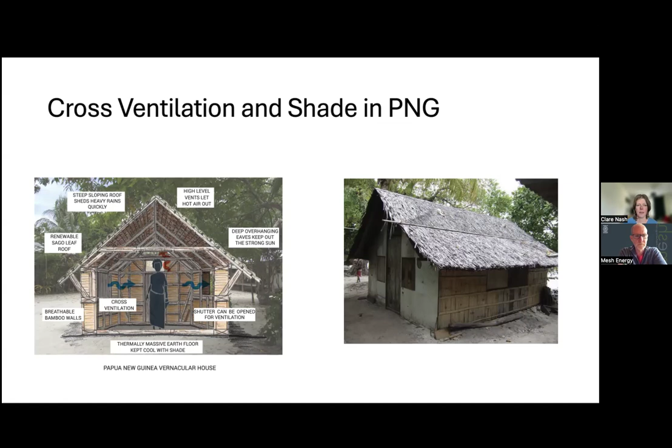It has a very steep sloping roof because it rains a lot. It's very renewable, very easy to build yourself. Lots of cross ventilation. So when you go in one of those, it's lovely and cool, even though it's absolutely belting hot outside.

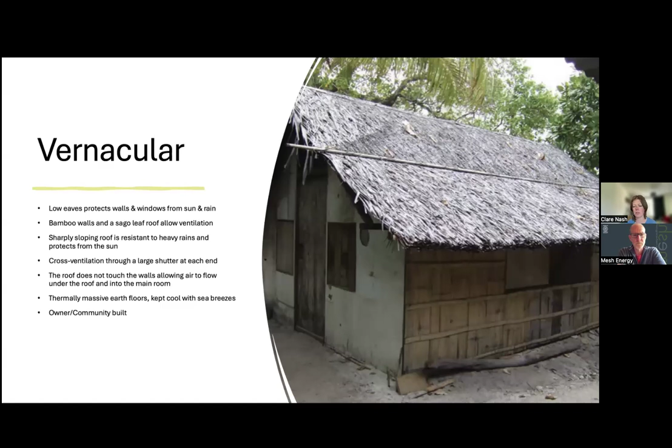So I went to look at the mining relocation housing, because there are lots of gold mines on Papua New Guinea, and they needed to relocate people in an appropriate way, giving them something that's aspirational that they actually want to live in, rather than just you have to move, you have to be plonked here kind of thing. So they worked with some architects called Asai Consult, who tried to take all the best bits from the vernacular and turn it into a new building, which mostly worked. It had the aspirational thing. They all wanted to move in one of these.

And the other issue was that when the mine goes, there would be no power. So they couldn't just give them aircon. They all wanted aircon, but they couldn't give it to them because they knew the generators would all go with the mine. So it had to be completely self-sufficient. But some things just weren't feasible on a mass scale. So the sago leaf roof just doesn't make sense because it's expensive to build, and then there are ongoing maintenance costs. So they went for this Zincalume roof, which is very tough.

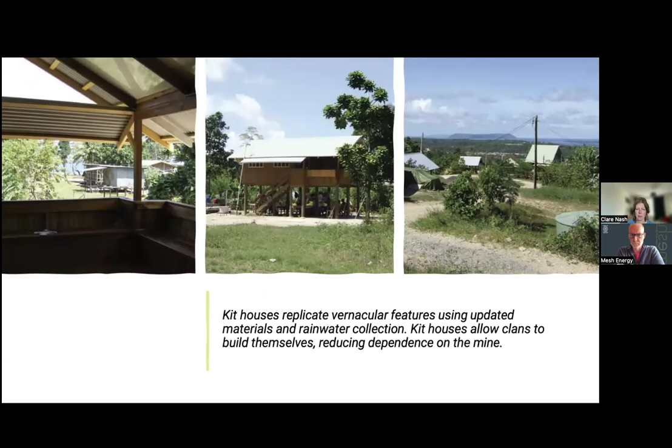But the issue with that, and I will go on to it later in another case study, is that they all want the tin roofs. It's very aspirational for some reason. But obviously the heat just goes straight onto your head. It's really hot. So how to mitigate that? They did it using an apex roof. But I think they should have gone for the full double roof that you see in Australia, which I'm coming on to. The other advantage is that they had additional mosquito proofing, and you can't do rainwater collection off the sago leaf roof, so they can now.

And it's community built. They can still literally build it themselves. There's a guy, the head of the clan, who organises it all, much like a site contractor would do here, but he's just bossing his mates around really, which is quite fun to see. So they wanted to leave them with the independence to do that.

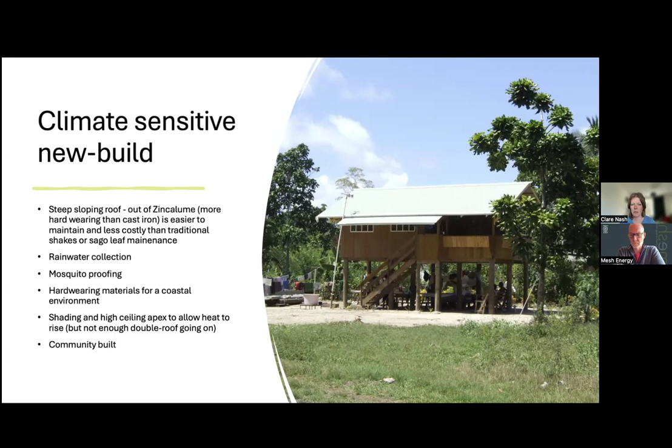On the continent, nobody has that. They have massive, great big windows looking right into each other's houses, and nobody cares. And it was a bit like that at Ashley Vale. They had the same kind of thing, and they just said it's because we've all built together, we just have a kind of courtesy. We don't stare, we just look away. Yeah, so it's a completely different attitude, and I quite like it.

Yeah, so then there's the community stuff, but then there's the tech stuff. Steep roofs obviously make loads of sense for the UK. You can have a pinprick hole in a flat roof and you'll get a leak, but you can have a whole tile missing on a pitched roof and the vast majority will just flow past, which is really beneficial. You can collect lots of water. I think we should be thinking more about cross ventilation.

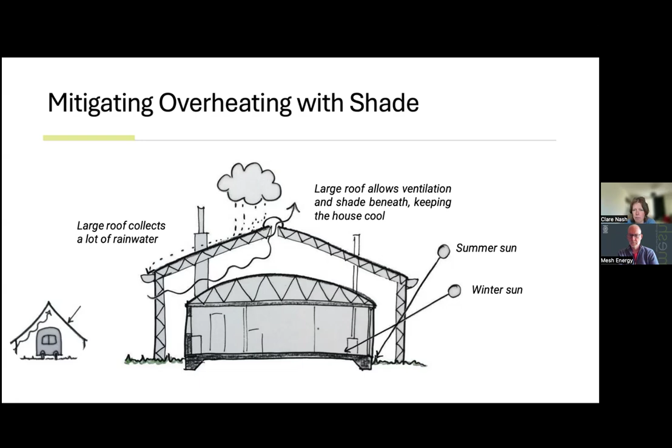Yeah, so he did this concept. So it's a bit like building under a barn, really. There's quite a big gap. So what I want to find out in the next book is what is the ideal distance between those roofs that makes it work so well. Yeah, and the heat, usual kind of passive solar shading and everything.

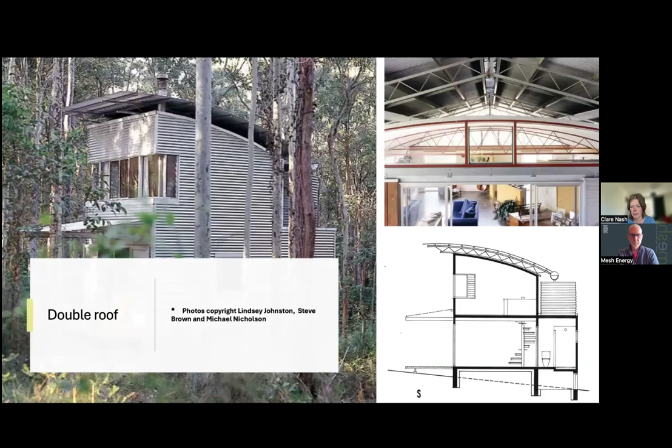So he did the same principle. These are holiday homes in the forest near where he lives. And then this is some Glenn Murcutt bits, just in case you haven't come across him. He does really interesting things that relate to the agricultural past and applying it to what people need from buildings today. He's really worth looking up if you haven't seen him.

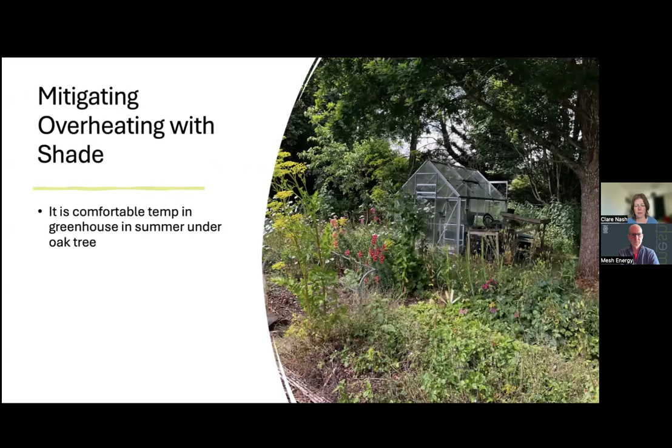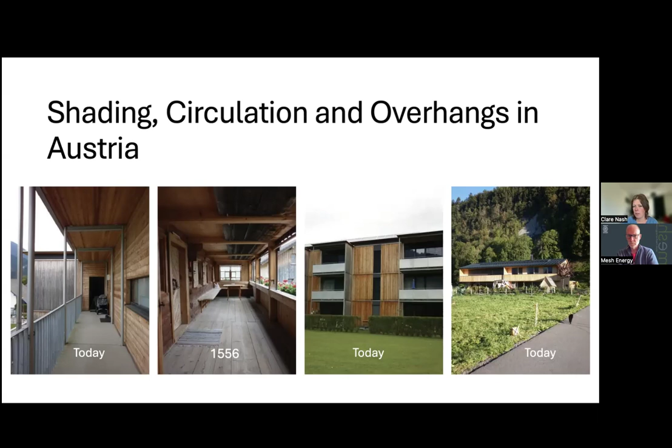This is Housing Association, completely timber frame, 3-story, new build passive house. In fact, it was more than passive house. And then on the far right, don't know if you can see it, it's the same thing, but a modern new build house for an individual. And this is Mole Architects, so they've done the same thing, but they haven't done the circulation.

And this is Charlie Luxton. I just spotted this on Instagram the other day. I thought, that can go in my thing, because it's just what I wanted to talk about. He's done that with Greencore construction, so it's prefab, but they've obviously stone clad.

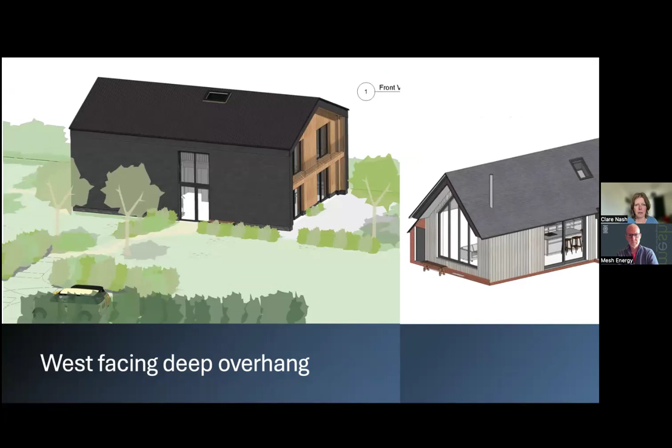Yeah, and we do bits of it. So we've got west facing overhangs that we like to make verandas out of. These are not fully realised drawings, but we're getting there; they're getting planning permission at the minute. And yeah, this is the kind of thing we do with housing.

So we take inspiration from the kinds of materials that are nearby, and pitched roofs, obviously, and we try and extend roofs to create overhangs for shade, but also it's amenity space. It means you can sit out all year round, not get wet, and also not get fried in the summer.

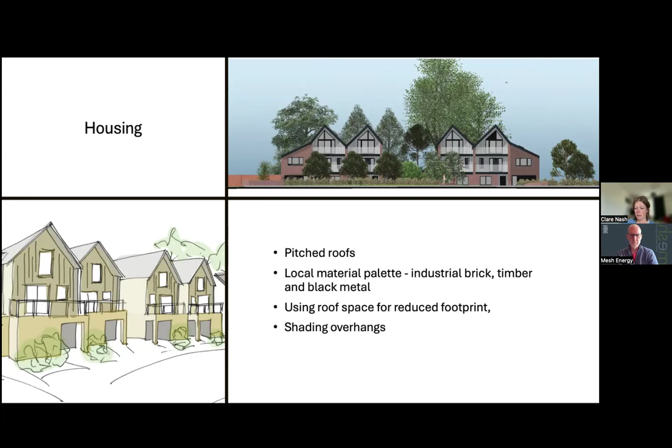Yeah, so applied to barn conversions, when we want to insulate, but then there's the loss of thermal mass, what do we do about that? And we don't want to lose the nice cool barn feeling that you get in summer.

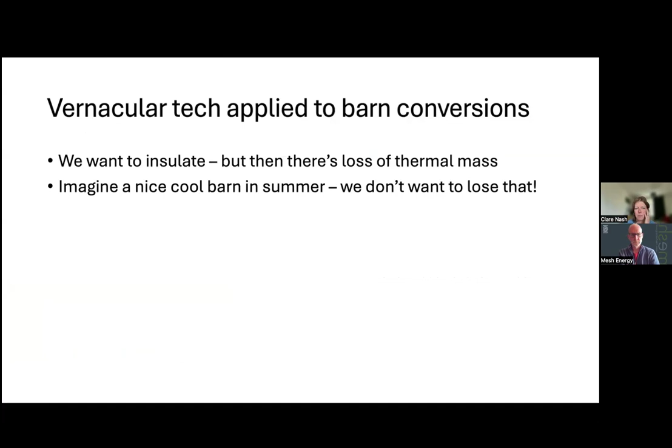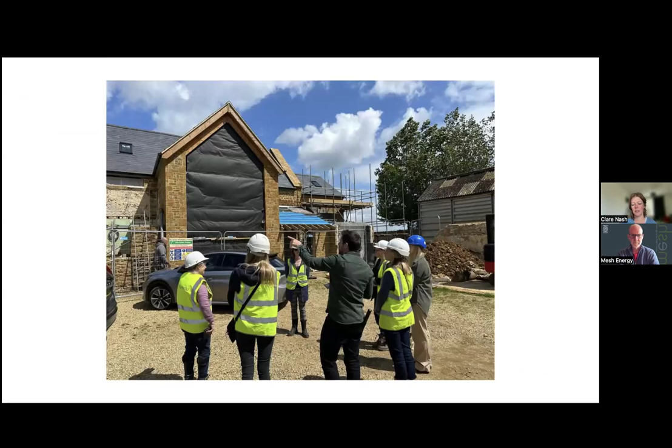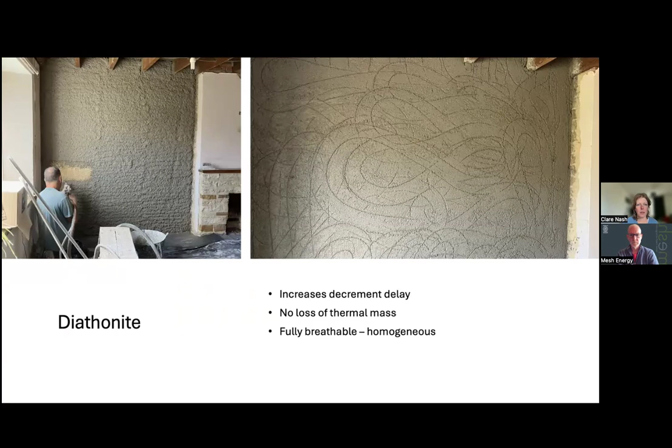And then we're using Diathonite, which has really helpful benefits because it's very insulative. It's also breathable. There's no loss of thermal mass. And because it homogenizes with the wall, you benefit from that. And then on the roof, wood fiber, because it adds that decrement delay, nice and thick. It's thermally massive. So we find it's better than using Celotex or similar.

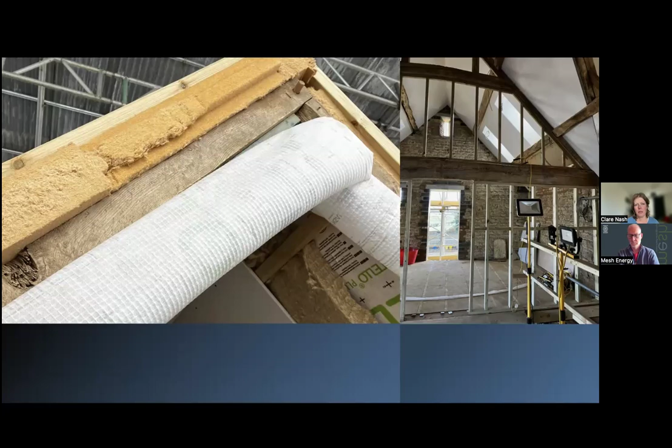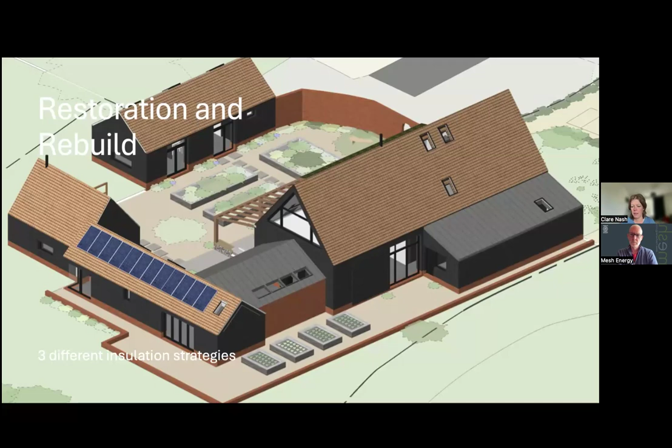This is the heritage barn. We're dismantling the whole thing like a Meccano set, and then we're putting it back together. The existing timber frame we're using as a service void with exposed timbers, because the client was very clear. She wants to live in a barn, not something white plastered everywhere. So it will look fantastic when it's done. This is what it looks like at the minute. That's the plan. That's the inside. So the beautiful timbers that they loved about it.

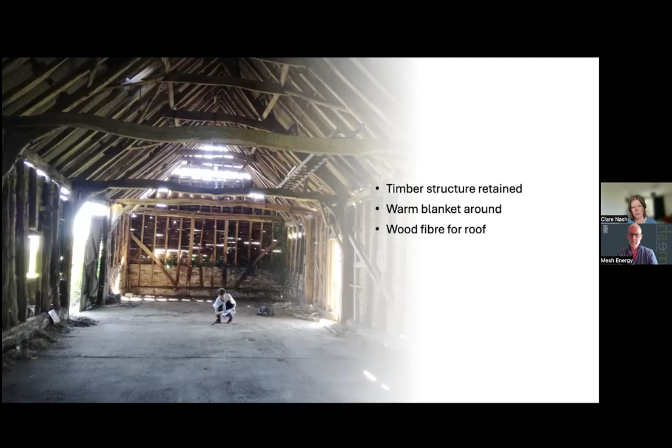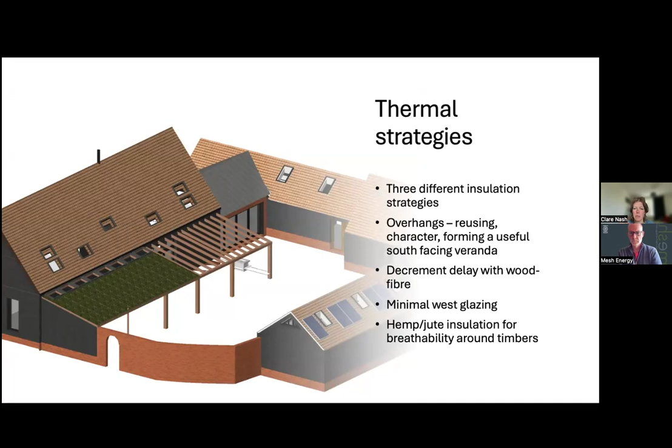It has been tricky to get past planning because it's a rebuild. So we've had to be a bit vague. With help from the very useful planning officer, we've had to write it quite vaguely so that we can essentially rebuild it. But it's got these existing lean-tos, and the client said they'd quite like them as a veranda anyway. And it's useful because that's south facing, so it'll be a handy shade to the rest of the building behind. Plus they can use it as an amenity space. So quite like that.

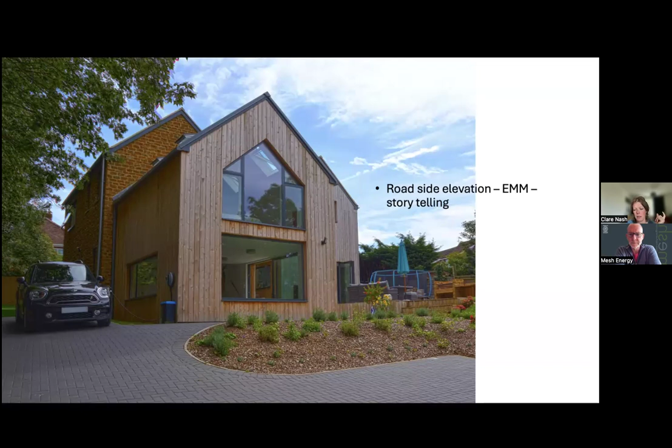And then prefab. This is a project we did for a new build house. That's what it looks like now. But it was quite interesting because it was put up in 3.5 weeks. The only thing I don't like about it is that it's foam insulation, which has high embodied energy. It is done in a factory, has lots of speed, but you lose that thermal mass thing. And it's the embodied energy thing.

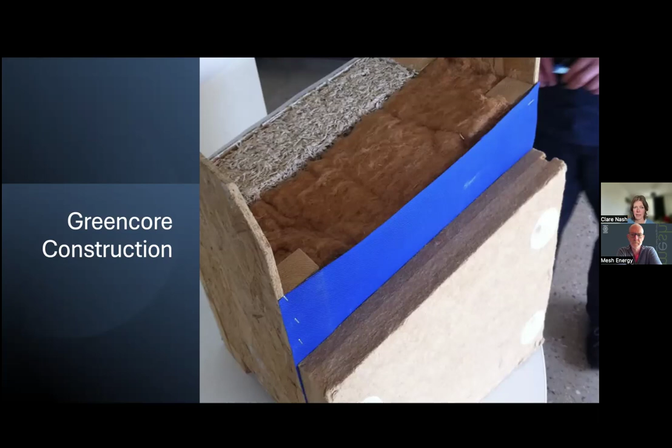So I would rather use Greencore construction, but they don't do one-off homes anymore. So I'm trying to find someone who can do that, because I do think prefab is such a no-brainer. I like masonry as well, but if you want something delivered en masse that's going to achieve efficiency targets, U values, everything, airtightness, and then you get a set of builders that all they do all day is just that, it's so efficient. You don't have to worry about weather, there aren't delays. It's very attractive.

But what was interesting about this was two things. One was that all of the people that moved in were completely unknown to each other before, but I arrived 6 months in to interview them all, and they all knew each other's names, the names of their cats. It was really close, and it's not just because, but part of it is they have these open-ended gardens. There's a lake further back, which entices people out. And also when you're in the house, the party walls are done so amazingly. I mean, this is just how it should be built, but it often isn't.

The architect had to pay a lot of attention to the workmanship as it was going along to make sure the sound insulation was done well enough. But you can't hear anything. They haven't got a clue when somebody else is next door. The only time they know is when they're in the garden and they're saying over the fence, hello, kind of thing. So that's a really nice way to live, because you get to choose when you want to interact with your neighbours. You're not bothered by their noise or anything.

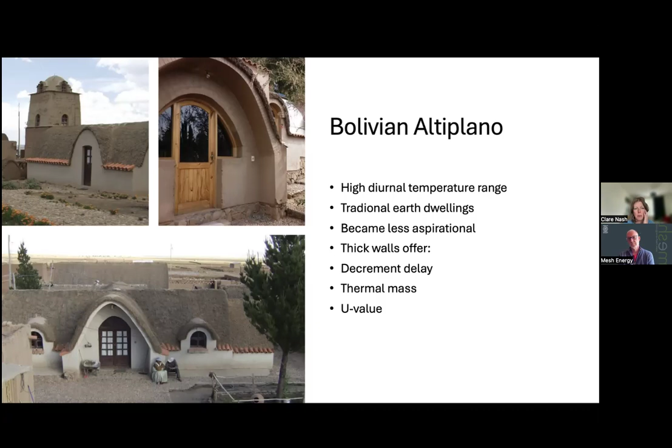And they also bore in mind how people actually live there. I mean, it's a bit similar to Papua New Guinea, where they live outside quite a lot. So they have collections of buildings around courtyards for different functions. So there's a sleeping house, and there's a cooking house, and there's a toilet thing somewhere. Yeah, so this is a much better way of life for these people, but giving them the status that they need as well. Yeah.

And then this is in China, same kind of thing, except that Xi'an University saw a big problem in that people who were living in the countryside in these kind of cave dwellings, which is the original form here with the sugar paper windows, but completely thermally massive, built into the side of the hill. I don't know, yeah, like that.

Yeah, so with the combination of that and the Kang bed, which is, so they have a little stove where they do all their cooking and everything, and then the heat from the stove goes through the bed, which they call, it's like a mother to them because it's always warm and they all sit there all the time.

So the combination of that and the thermal mass means they maintain a steady 16-degree internal temperature year round. Bearing in mind this is northern China, it's freezing and also very hot. So instead of a high diurnal temperature range, there's a high seasonal temperature range, and the earth is still very appropriate for that.

So anyway, Xi'an University were worried about people moving to the cities and living in unsuitable modern apartment blocks and not being able to afford to heat it because they're not suitable for that climate anyway. And then you're paying a lot for the electric heating, which is expensive. So fuel poverty was a huge problem.

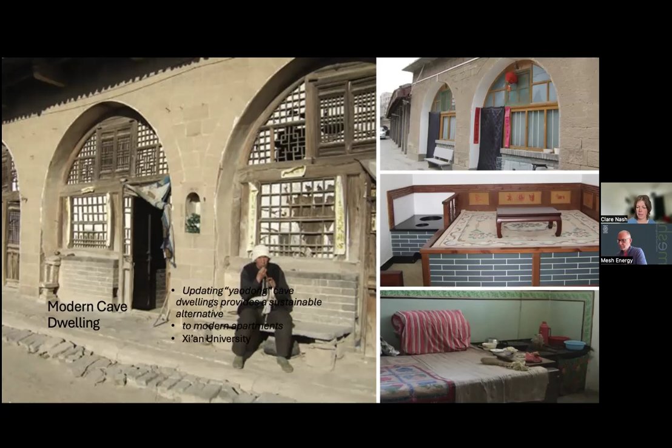So Xi'an University decided to come up with a modern version, still with the Kang bed, still made out of earth, but a bit of extra concrete support because of modern earthquake regulations, and earthen roofs. And they look like this on the right-hand side, and proper glass as well, not sugar windows anymore. And they're really popular.

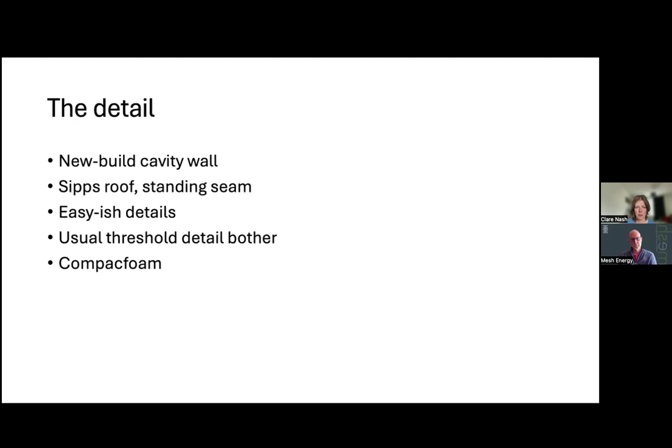So I don't know, I suppose I've got more questions than I have got answers. Oh yeah, I think that slide's in the wrong place. So yeah, feedback please. Okay, cool. I'm sure we'll be in a position to give you some feedback, most definitely. Sorry, 2 secs. There are some questions actually. Let me address those first before I start wittering on. Just going backwards.

Brian's asked, do you know how they form the barrel vaults in mud? Yeah, in fact, they had some really nice instruction leaflets that everybody could just pick up. I'm sure I put one of them in my book, so if you contact me, I can send you it. But it's a bit like bridge building, where you get those curved bridges. You just have to do it gradually. I don't know exactly how it works because I didn't do it, but it did work.